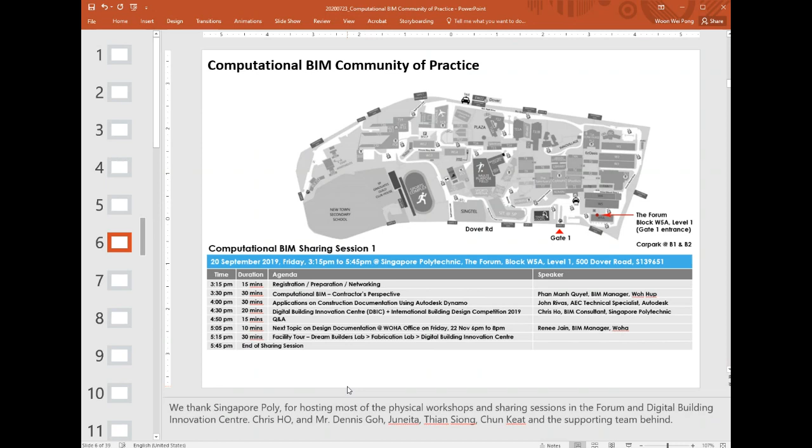So these are some of the flashbacks. We thank Singapore Poly for hosting the physical workshops and sharing sessions in the forum, and of course the DBIC, Mr. Chris Ho, and Mr. Dennis Goh, Juneita, Thian Siong, Chun Keat, and the supporting team behind.

So for all the past events, as you can see, we have Woh Hup leading the first contractor session with Manh Quyet sharing his experience. Then we have John Rivas from Autodesk leading the first session, introducing the concepts of the computational approach.

As you can see, it's very comprehensive. Then the DBIC, Chris Ho, leading the consultancy and the BIM courses. And of course, Juneita and Thian Siong leading the competition, which is actually concurrently ongoing. Today is the assessment day.

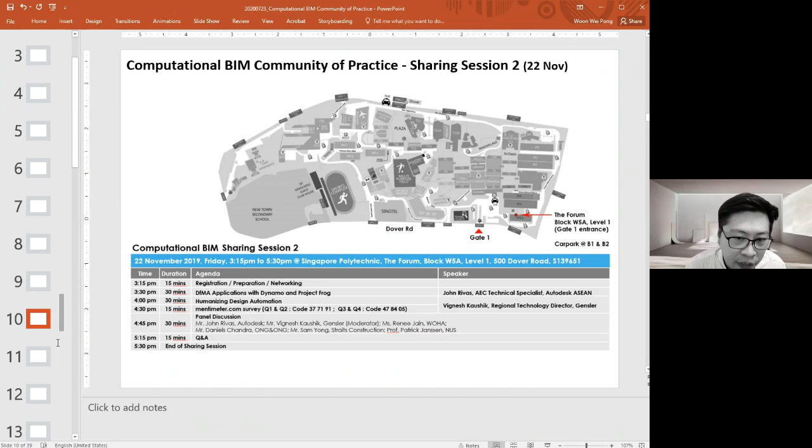So this is the second sharing session. The first session is actually led by our contractor, then the alternate one will be consultant, then moving forward, then back to contractor. So this is our arrangement.

As you can see, John shared Project Frog with DfMA. And we have Vignesh sharing about design intelligence with the human factors behind, generating lots of designs within a very short period of time.

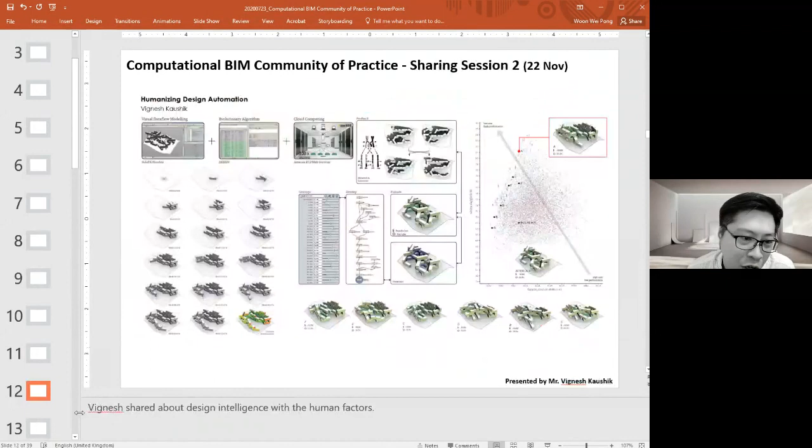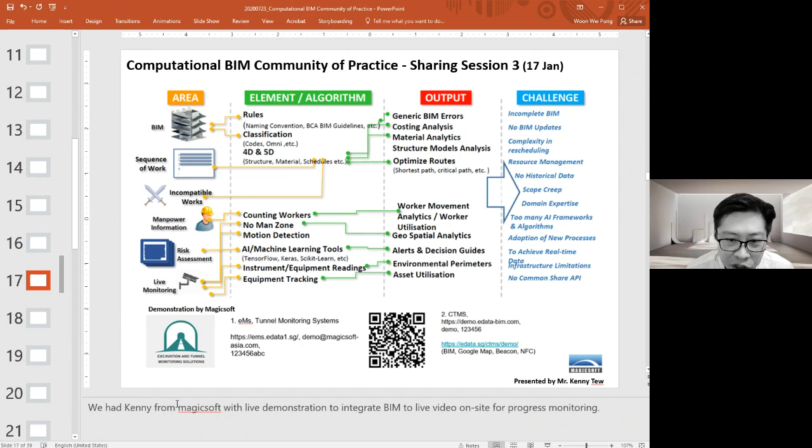Moving forward, we have Edmund Raymond from Straits Construction to share the computational BIM implications on safety aspects. Then we have the solution provider, Magicsoft, Kenny, who did a live demonstration integrating BIM into live video on-site for progress monitoring. And John also shared about BIM 360 on safety management.

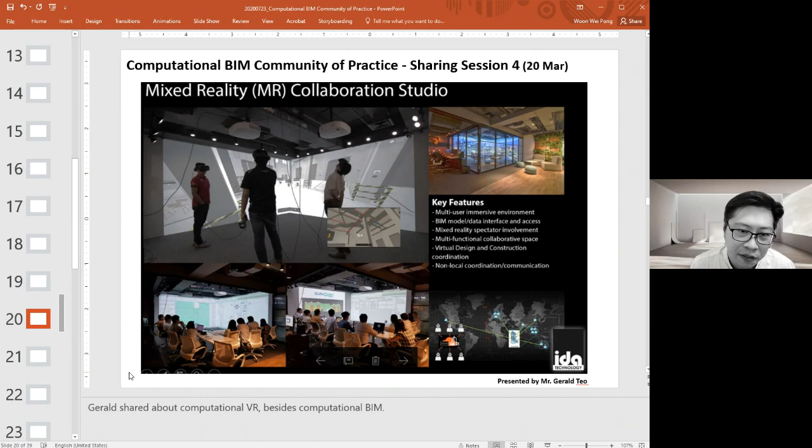Then we have IDA. During the COVID-19 pandemic, IDA hosted a session to introduce their VR studio. As you can see here, this is their studio, very small but comprehensive. With computational VR, you can actually tweak all the parameters on your laptop while visually viewing and engaging in a 3D immersive environment.

So Aloysius presented his involvement in Future of Earth by SUTD and some of his works as well.

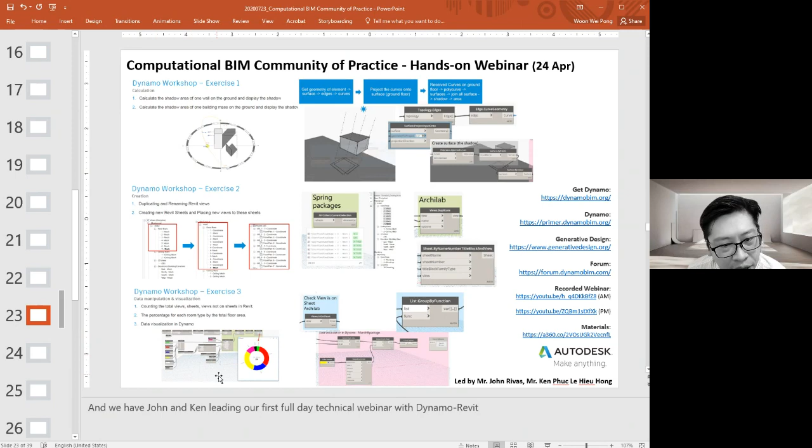John shared about using Dynamo for more applications, especially in safety. So in the past events, we have three topics: documentation, safety, and code compliance. For this, John and Ken actually led our first full-day technical webinar with Dynamo Revit.

It's free to the public, so as you can see, we moved on to webinar sessions, and Autodesk generously supported the cloud solution with generative design. And Ping Lei from CPG shared about Python Rhino calculating the unprotected opening, a very detailed session.

And all of these past sessions are actually available on the website now, recorded. So supposedly Chinacon should have shared, but he couldn't make it due to the COVID pandemic.

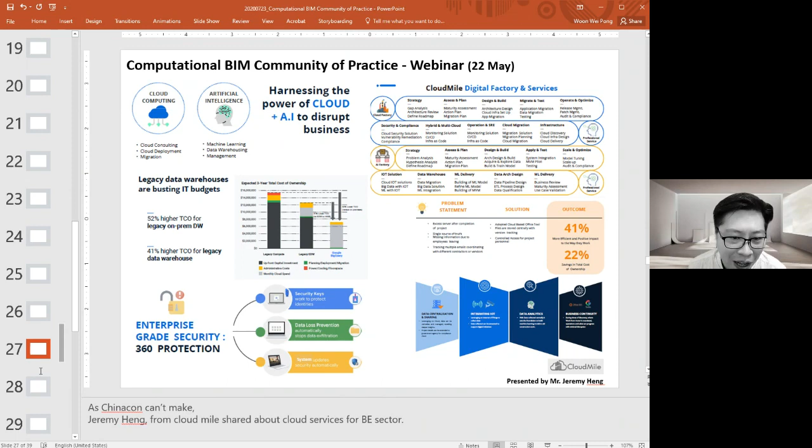So Jeremy Heng from CloudMile shared about cloud services for the BE sector.

Moving on, we have the recent workshop, again supported by Autodesk. John and Ken actually supported this workshop, Computation.space. As BIM Origin was closed, Computation.space is introduced to continue the efforts of computational BIM sharing as the resource.

So let's move on to the recent survey report. I have a few slides comprehensively sharing the opinion of the respondents. We sent it to 450 participants, and from there we received 119 responses.

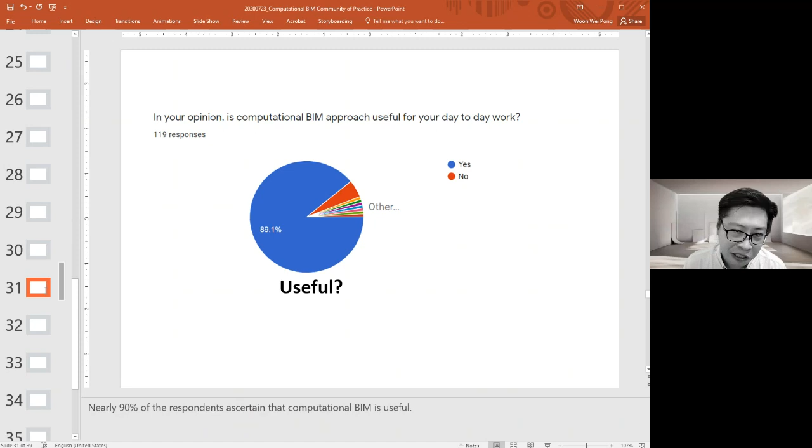First thing: is it useful for computational BIM? 90% gave a certain response that it's useful. Have they started using it? 40% mentioned they've started.

Then, why, if they are not using it, why are they not using it? Most shared that they're still in a learning process. Some mentioned they do not know how to do it. Some mentioned that it's mainly due to their contract and job roles, after investigating with phone calls.

And if you're using it, what are you using it for? It's quite evenly distributed across concept design, design development, tender documentation, construction documentation, and others as well.

So what are the hurdles, meaning the difficulties encountered in applying computational BIM? As you can observe, there's a steep learning curve, insufficient resources, and slow speed. What does slow speed mean? Sometimes the visual programming, when it comes to certain complexity, causes the software to hang. So the problem is how to move forward with this.

I suppose there could be solutions that you guys can share with us. So we're asking: can you share your computational BIM experience in one of the upcoming webinars, such as a talk? Roughly 70% mentioned yes. And can you share it on the website? 20% mentioned yes. Moving forward, we're trying to collate the responses, as you can observe.

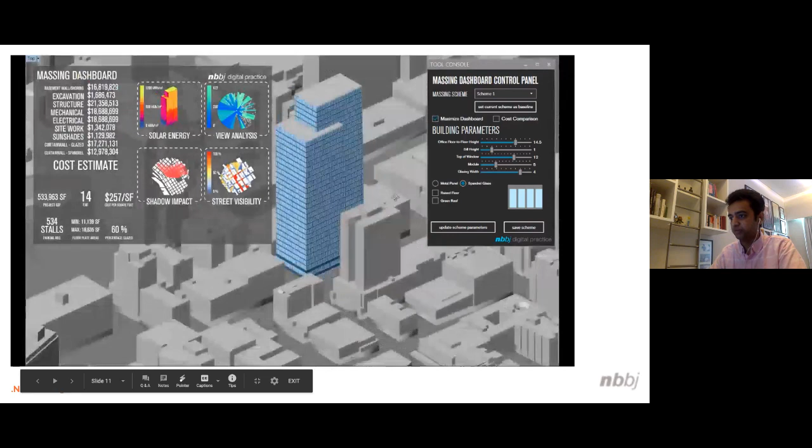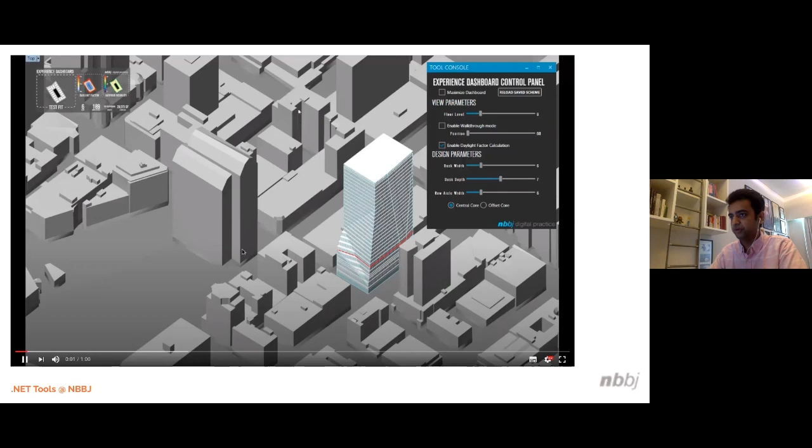This is within the Rhino environment, and we're doing this massing analysis dashboard or control panel that shows, based on any building scheme, what kind of cost comparisons you get, material estimates, and so forth. Moving to the next slide since this is more of the same. This is another similar dashboard that we built, I think about 3 or 4 years ago, and this was more about human experience, understanding interior views and daylight and so forth. Again, very similar to the previous dashboard, just looking at a different idea and getting different data out of it.

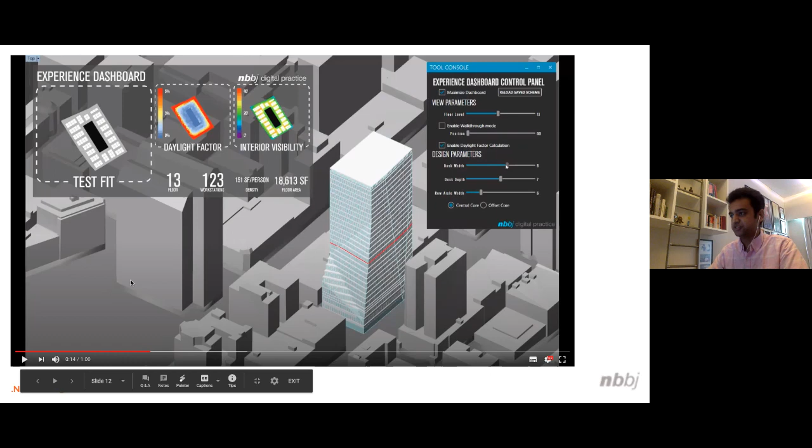So this is the kind of ideas that we had in the beginning. We wanted to build these tools that gave you data side by side in your design process, primarily in the Rhino environment. And this worked great for a while. I wanted to show you guys some of the projects that came out of this kind of thinking and these tools that we've marketed widely.

Another tool, again, you can see is kind of auto-generating documentation for this thing called prospect refuge theory, which is a theory of brain science that we like to use to implement our designs.

So in that whole thing you saw, it looked pretty great in some contexts, but we had some issues with this process. First of all, the UI was a little bit dated. For those familiar, Human UI is built on WPF, which is the Windows framework for presentations. WPF is useful, but it's also kind of old and a little bit dated. It also leads to poor performance, complex workflows, and most importantly, if you want to make any change, you have to ship these Grasshopper files or EXEs to 900 to 1,000 designers in the firm each time and have them reinstall it, which turned out to be a huge problem for us.

But anyway, going beyond the issues, I just want to show some project case studies to show the kind of things we got out of this way of thinking. So the first project is our Samsung headquarters in America, in Silicon Valley. This project was one where the client extremely heavily asked us to rely on data as a way to inform the design process. And this building was extremely heavily simulated, analyzed, and almost every single formal decision being made is backed up by tons and tons of analysis and data.

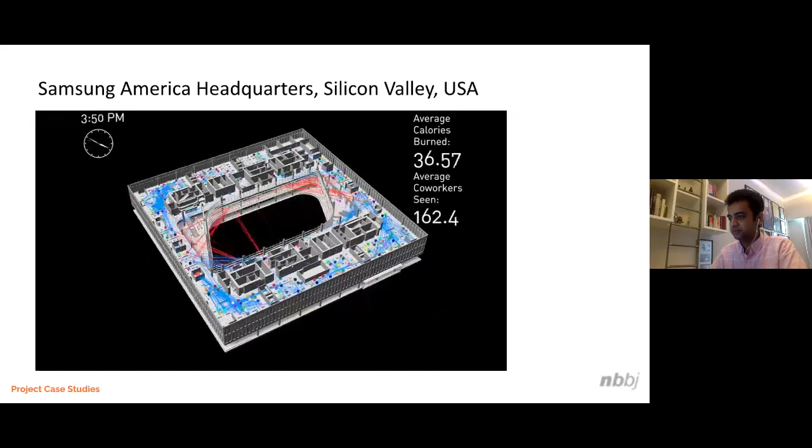The other one, which is more towards computational BIM, is the Denny substation in Seattle, Washington. This is an electrical substation—where power comes from the power plant, gets transformed into a lower voltage, and goes to your house. In this substation, we wanted to design something a bit more friendly to the urban context. Most substations are very ugly; you don't want to actually be near them. But we wanted to take the substation and turn it into somewhat of an urban park.

That's kind of how this form was generated. But to generate this form in the end, we did a lot of analysis and simulation to understand two main things: the performance capabilities of this substation in terms of daylight, and secondly, we wanted to minimize the surrounding buildings' view into the substation yard, so people don't have to see the electrical equipment they don't want to see.

So this is a quick video. I'm not going to go through the entire thing, but it shows our process of how we went from design to documentation in the days before Rhino.Inside. This was just Grasshopper and Dynamo, and how we managed to get all these panels to work for us based on our sketches and daylight studies.

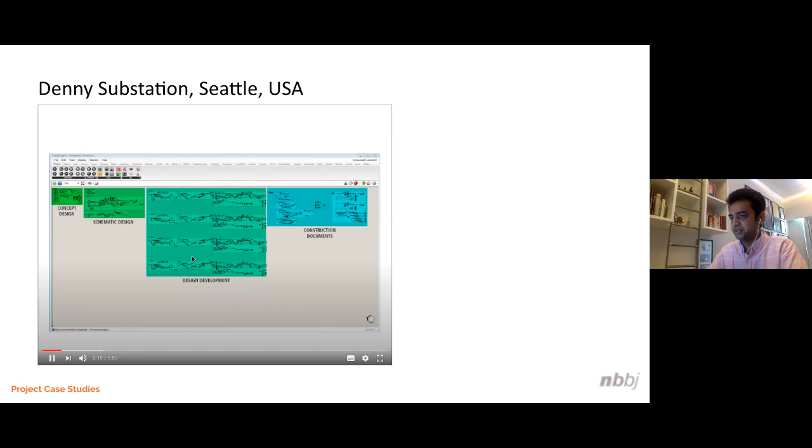As you can see, our Grasshopper script grew over time, representing the different aspects of our design process. If I scroll forward, you can see we had a lot of rationalization and design iteration along the way to make sure those panels perform the way we wanted them to.

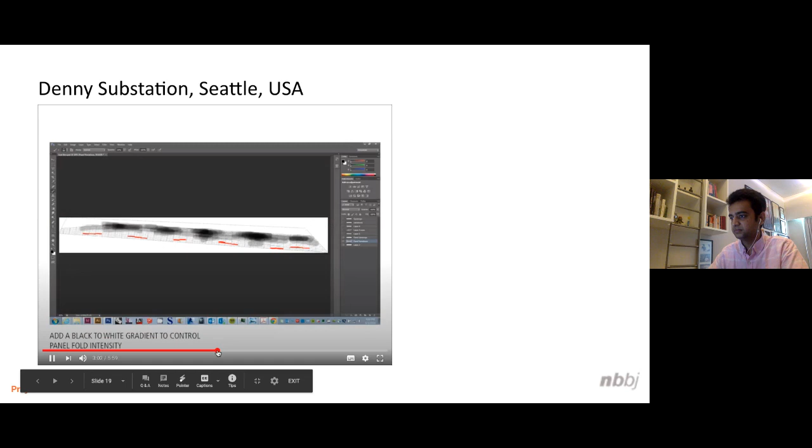The whole idea here was we wanted to quickly go from a gesture in Photoshop to a fully rationalized design idea in Rhino or Revit. A designer can take a spray paint brush and spray a certain pattern on top of this facade, and that pattern gets represented 1:1 based on paneling in Rhino or Grasshopper. That's the whole idea behind this gestural looking facade in the station.

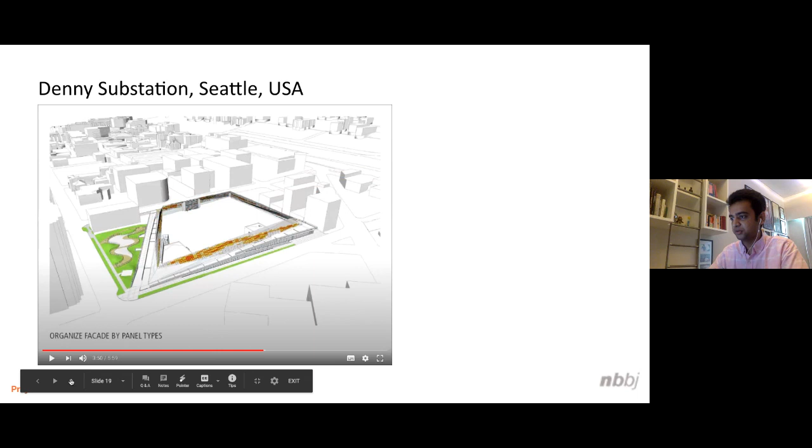Beyond the design gesture, we also wanted to optimize the layout of these panels, using daylight and heat studies to understand which panels are getting heated the most and how we can optimize that. We did solar studies to minimize the solar radiation coming onto the yard of the substation, which also helped inform the layout of these panels.

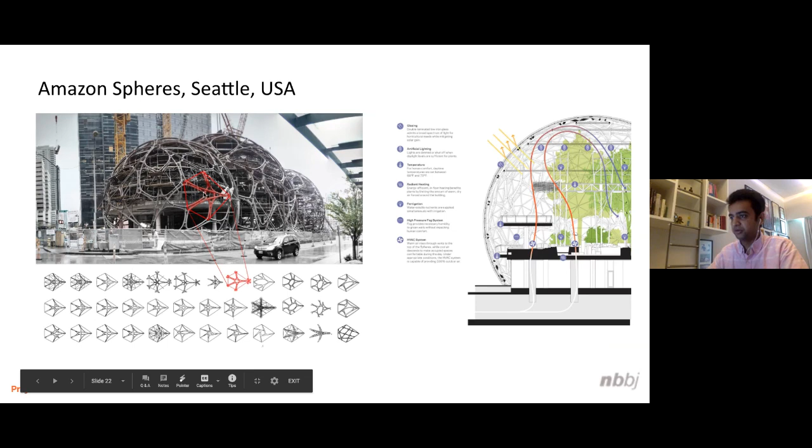This was something we studied a lot using Grasshopper, coming to a final conclusion on shape in coordination with our structural engineers. This is another quick video showing how we tried to figure out how to get an entrance into this building. That's a fairly easy problem on the face of it, but there are tons of considerations when creating an entrance based on this structural shape, so we ran a bunch of analysis based on this digital model.

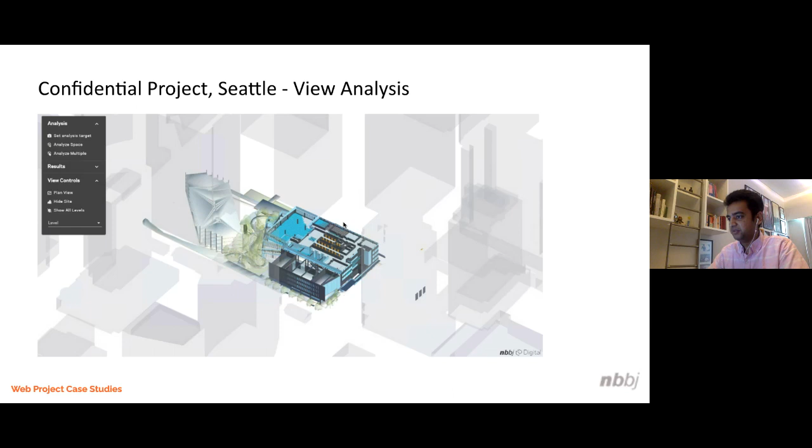We also have a web daylighting tool, which you can see here. I'm going to skip through this since the next tool is also quite useful, and I want to leave space for questions if there are any.

This was another tool: a survey that we send to our clients to understand how the space is performing for them, how they're feeling about the space, and so on. We then collate that data and represent it to our design team so we can better understand how to serve our clients better. This tool is also a web tool—a web survey, just a link we send to clients—and it was built completely from scratch by our team to maximize customization of the survey.

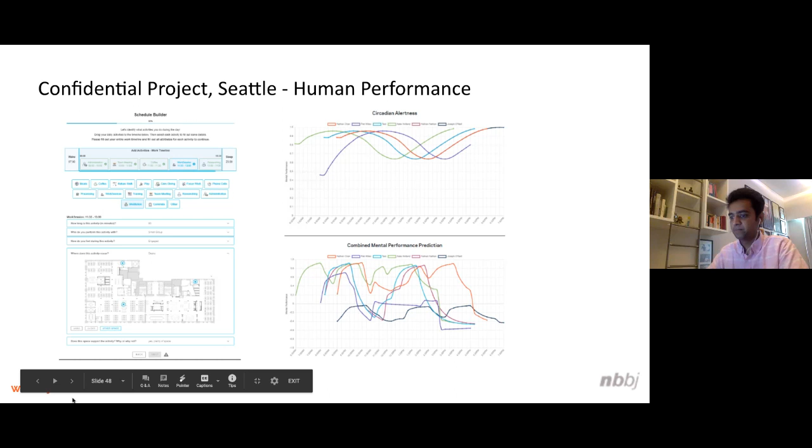Lastly, this new web process we've been working on primarily relies on three principles: modularity, reusability, and reliability. By moving from .NET to web, we've become a lot more effective at achieving this. The exact reasons will be in my slides, and if Yvonne allows me, I'll be happy to share them with you. But for now, take my word that moving to the web has enabled us to do this a lot better than before.

At the end of it, this leads to better business performance. Having a better tool set leads to lower cost of change, higher performance, and most importantly better experiences for everyone—developers and users alike. That's the main idea we're going with in this web tool experiment that we started about a year ago.

That was all I really had to show, and I apologize for not diving too deep into the reasons, but I'll be happy to discuss that offline with anyone interested, or share slides. I'm going to stop here and open it up for any questions, or pass it on to the next person.

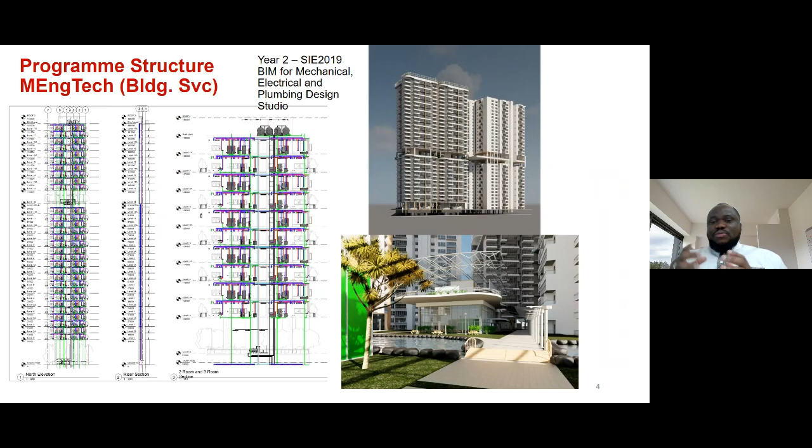and they were supposed to design the architecture, then from the architecture in Revit, convert it to mechanical. For students to develop something like this, they have to go to different resources online, different Revit communities, to learn how to solve the computational problems they encounter. But the design aspect, we teach them a lot.

This is another example of work done by a year 2 student. I can proudly say you rarely find a year 2 student, even in Singapore—I'm not talking about an architecture student, I'm talking about a mechanical engineering student—able to do something like this. This is an example of what I mean by training our students to be ready for the job, for the industry.

Because if they want to do computational BIM, they need to know how to use Revit, for example—they need to be grounded in it. And they need to know how to design, how to use design to solve problems. So they designed the architecture part and the MEP part.

In fact, this is a high-rise building—everything you're seeing here was done by just one student, and a lot of them did the same thing. Here's another example from another student. When these students came in, they knew nothing about the software, especially the mechanical part, and later on they were able to do something like this.

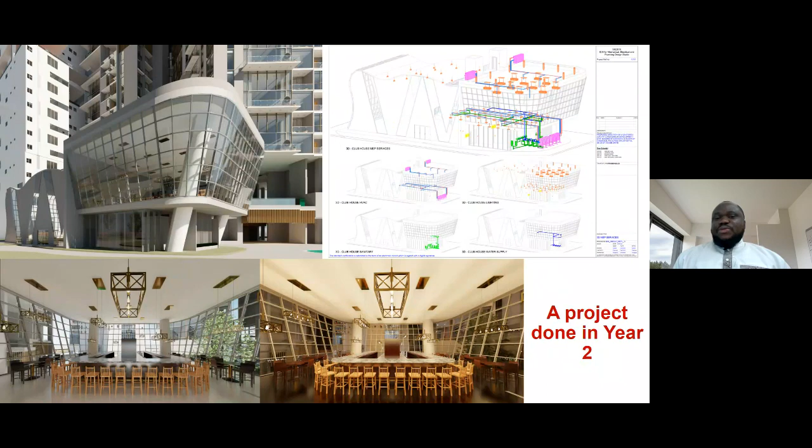All of this was done when they were in year 2, because we're trying to prepare them for the 12-month IWSP program, the industry attachment. Then during their industry attachment, this is an example of work done by one of my students with his team.

Even though the student is still an undergraduate, he was able to work with his team in his company to do something like this. During the IWSP, the 12-month attachment, we usually bring them back to the university for about 9 days, and throughout the year we train them on topics we haven't taught during the first 2 years of the program.

An example of such training is the use of Dynamo to actually solve problems in the built environment industry. The person you are seeing here is named Lo Juhan. Lo Juhan was one of our students also, and in fact, he was part of the first set.

When we started this program, we trained them about BIM and everything, but we didn't really focus on the Dynamo side, Python side of it. It was during the 12-month IWSP program that some students gave us feedback that they would like to know more about this. In fact, some of them actually used the knowledge of Dynamo and Python for their final year project. So because of the feedback we got from our students, which was part of our plan, and also from industry experts, we decided to develop this kind of training for subsequent students to further increase their skill and capability.

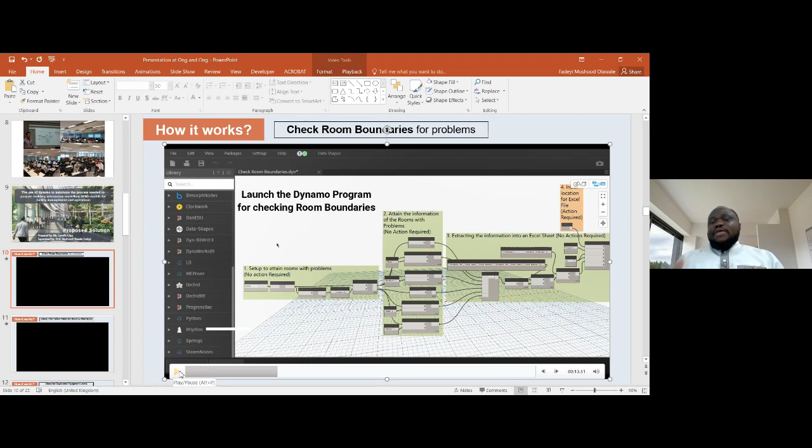The student used Dynamo to develop the solution - when you run it and use Dynamo, for example, to identify those rooms, you go straight into the BIM model to identify rooms that have problems in terms of boundaries not joining together. Later on, Dynamo will be able to differentiate those parts of the model with problems and those without problems.

Then from there, Dynamo itself will now collect all the necessary information particular to different spaces inside the model.

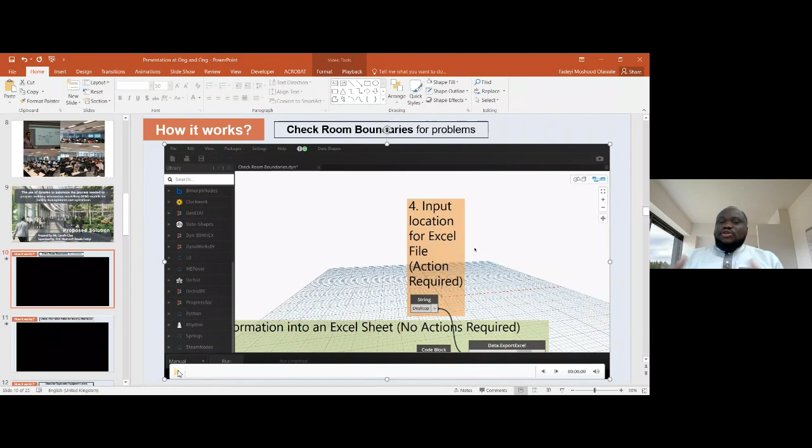You can easily notify the contractor or the third party that their drawing is not complete. In fact, those people preparing the model, if they have this kind of knowledge on how to use Dynamo to identify problems in the design, they can easily rectify their problems before they actually submit to their client, in this case the FM managers.

So another example - some of this information might not be complete. So we are using, in this case, an example of our MEP system.

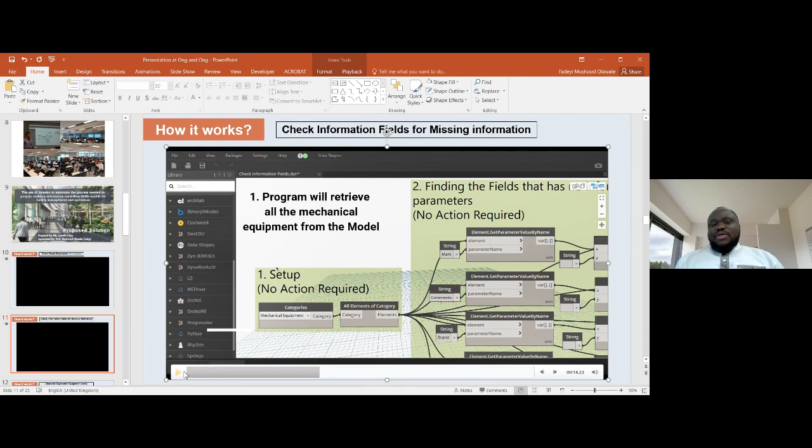My student developed all these things. She developed the program in such a way that it will be able to identify all the mechanical equipment in the model. Once you identify all the mechanical equipment in the model, from there you'll be able to...

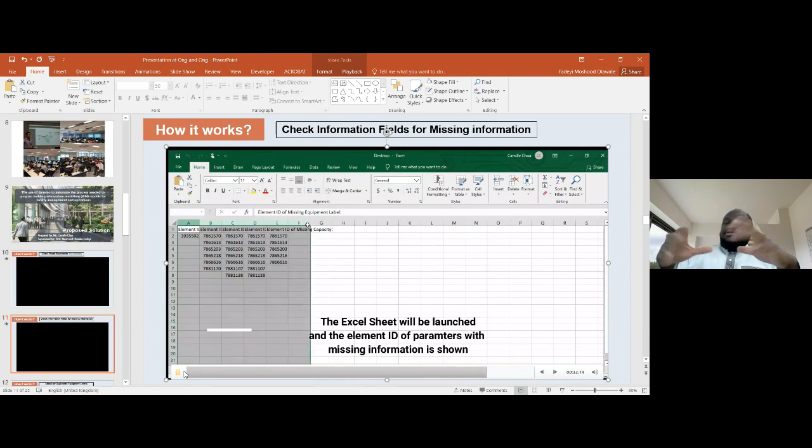This is another example on how to use Dynamo to streamline process, because it's all about process enhancement, about creating value. When we talk about productivity, it's not just about using computers or any kind of technology. We make this very clear to our students: first you must know how to remove waste from your process before you can add any value into that process. Otherwise you just increase your investment, and all the waste in your process will not allow your productivity to improve, because you've not removed the waste.

So again, teaching students how to use computational skills and knowledge they have to give value and increase productivity - this is the point I want everybody to take away. It's not just about using computational BIM. First of all, you must know how to use your design to identify problems, to identify the root cause of the problem, and use that design solution to eradicate the cause of the problem.

So sometimes when drawings are submitted, some of these drawings will just have a duplicated mechanical system. Let's say, for example, the duct could be duplicated because of poor design or forgetting to delete something. So how to identify it? Again, she used this to...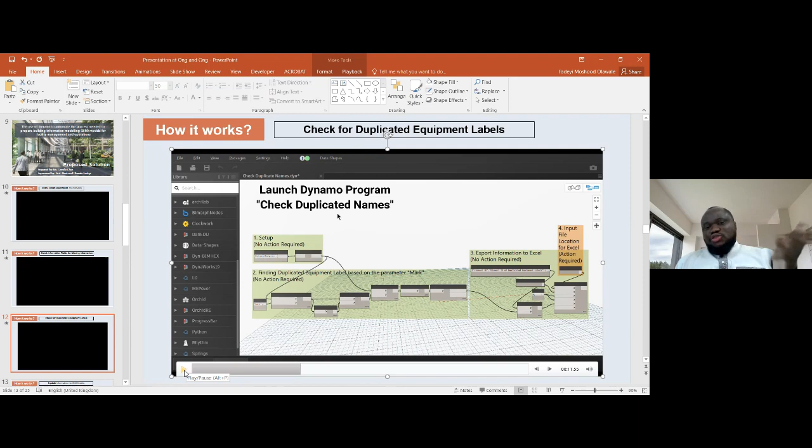But the point I'm trying to make here is this - she basically used...

I think the FM side can use the model because the model is the same as the as-built building, so you can easily use it. And I've had a lot of people saying that FM people don't really need computational skills. I believe by showing this kind of example, you better appreciate the use of Dynamo, Python, and different kinds of computational tools. It's not only to enhance the design stage, not only to enhance the construction stage - in fact it's going to be very useful at the FM stage also.

So again, she developed - I can share this slide with you also later on - how to update information in BIM models, how to delete unwanted items, and how to purge your model. Sometimes when BIM models are submitted...

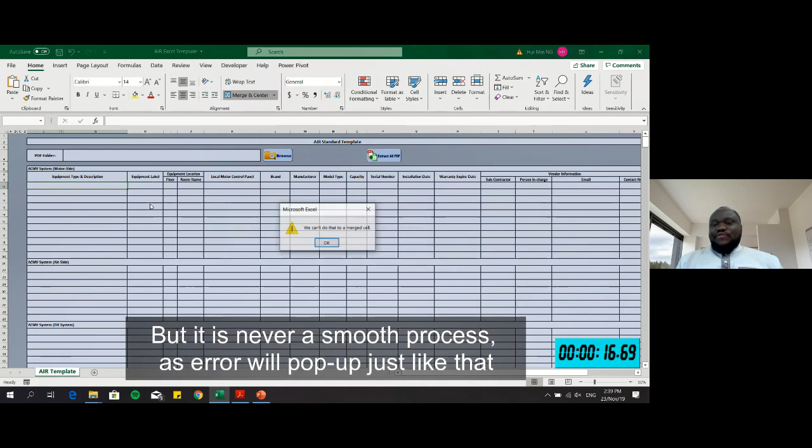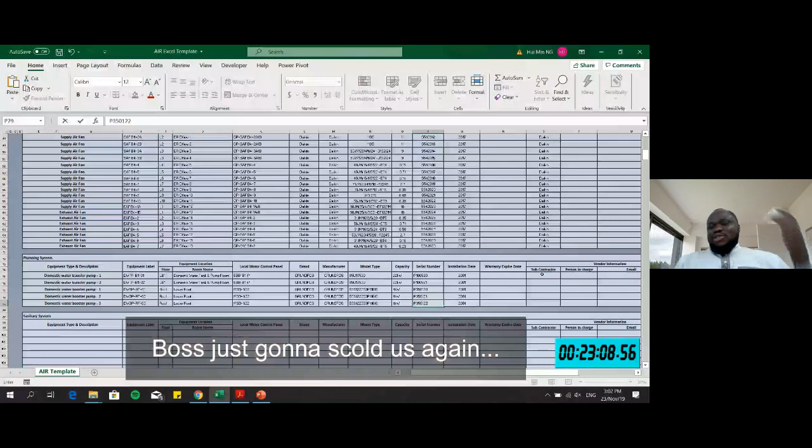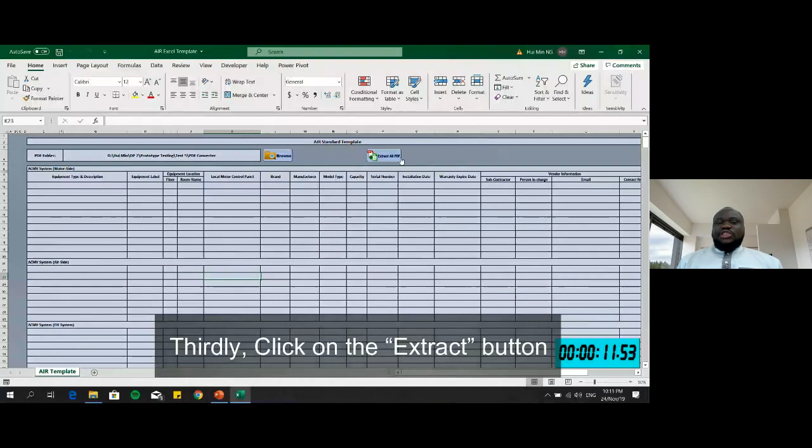So let's go to the next slide. This is basically the interface of it. So you upload the PDF. Basically, it saves a lot of time, improves accuracy, and one person can actually do the work. This is very, very important in terms of improving productivity.

What I showed you just now was actually the text aspect, in which you take text from PDF. What about pictures? For those of you familiar with FM, you know you have to take pictures, and there will be so many information. For example, let's say the aircon, the AHU, there will be so many information there.

You need to type in this information one by one into the Excel sheet, and also verify that information is correct. So a student from the Infocomm department actually worked with me and a professor from Infocomm to use Python and do a lot of programming to get information directly from image, whether PNG or JPEG. Take information from that and automatically populate it into the AIR template. This is another way of saving time, using lesser resources to maximize outcomes, and that's all about improving productivity.

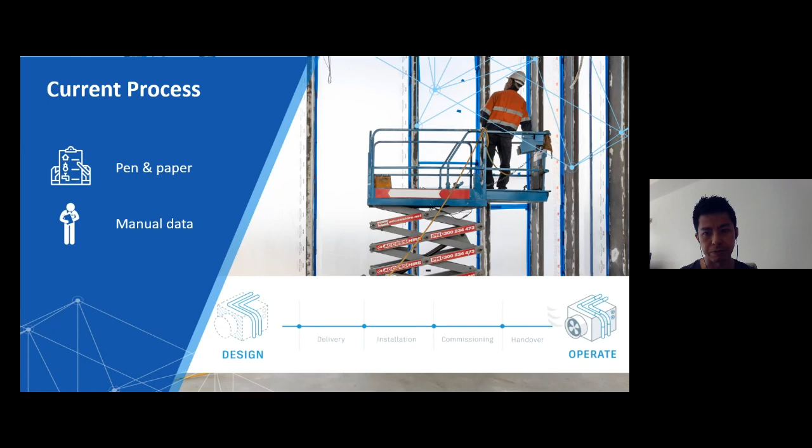Now, if you look at more details on the process itself, from the fabrication sites up to the maintenance site, basically they will go through a couple of stages. From factory, after they fabricate the modules or the component itself, they will need to load the modules into the transportations, and from there bring the transports to the site. From site, they will unload into a certain temporary holding area and proceed with the installations. After the installation, they need to capture certain data for the maintenance or the liability periods and so on.

Now, if you look at the current process, what is happening in the industry? I'm sorry, the screen is kind of lagging, so it might be off from my voice. All right, so just bear with it.

Now, if you look at all these stages, from the prefabrications up to the liability period or the maintenance: first thing first, most of the time they might be using Revit models, and they will be transferring into a fabrication tool like Allplan and so on.

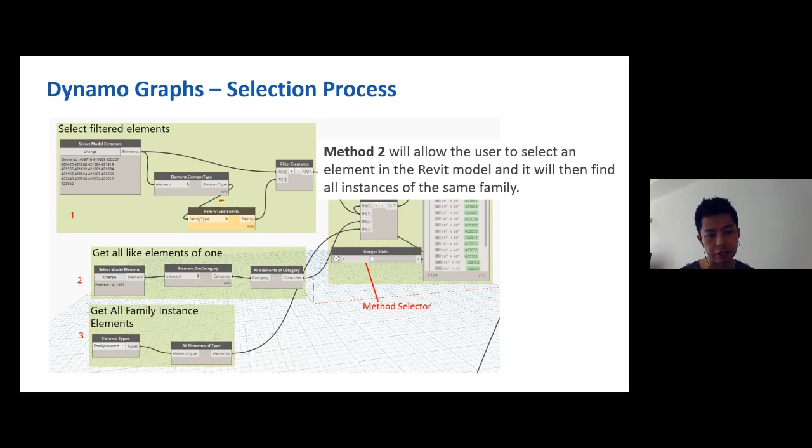In method 2, we allow the users to select elements in the model by searching for the instance or the same family, and so on. So we search for the element and match the category so that Dynamo can filter out the proper elements that we want to export into BIM 360 itself.

And in method 3, we will find all the elements that are family instances. So there's a couple of ways you can do the selection process.

Now, as of now, the Dynamo graph or scripts that we've done put all these three options together, because sometimes we do need different methods to select elements in your Revit model. So it depends on the situation — sometimes you might need to use method 1, method 2, or method 3.

So at the center, we've added what we call the method selector. The method selector is where we can control where the value will be picked up from — is it from method 1, method 2, or method 3? So basically, you can have a mix of it, or use the sliders to control it.

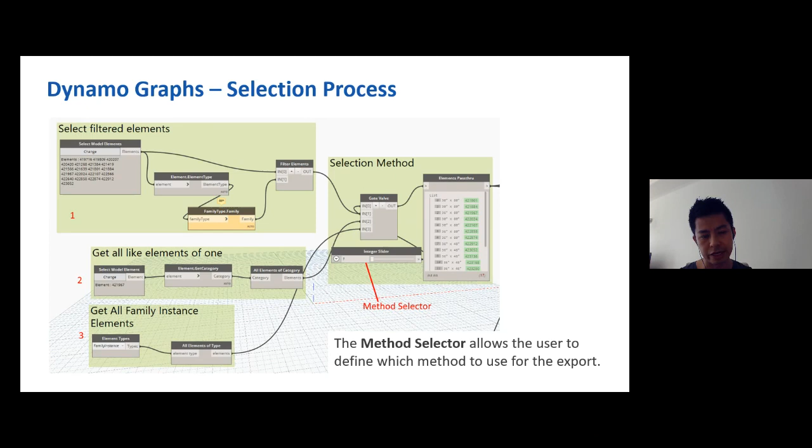Now, on the next step, I know some of you might be using BIM 360 Design. One thing that's critical here is during the selection process, the access path or the Excel data you're going to export into needs attention. If you're using BIM 360 Design, Dynamo cannot recognize the path locations because your model is not on your local server but instead in BIM 360 itself. So to keep things simple, it's best for users to store the documents on the local drive, so it's easiest to manage.

Now, once that's set, if you look at the process earlier, we're going to capture the data from Revit, and we're using Dynamo to push all the assets or modulars in your Revit model into BIM 360.

Now, just a quick note on BIM 360 assets — what it does is help you manage the documentation, centralizing all of it. So whatever modulars you have in Revit will basically become part of the assets in BIM 360.

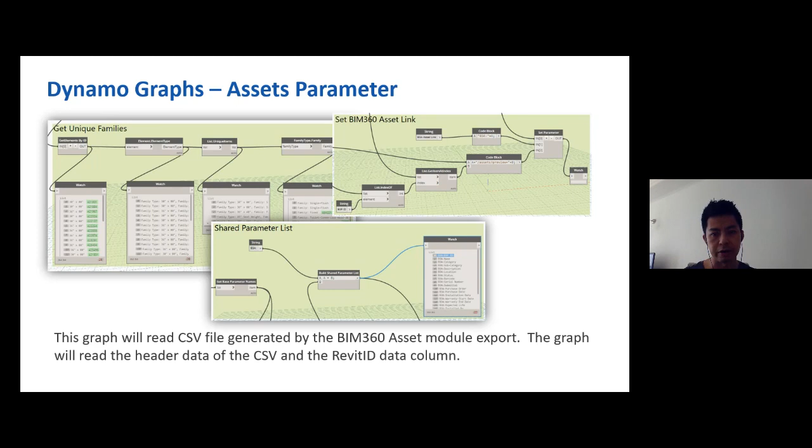Now, just a quick recap before I end my session: by using Dynamo and also BIM 360 in the workflow of the DfMA, you will be able to see that the process will be more streamlined, and also you have quicker resolutions between the stakeholders. So if I have any issue on site, the fabricator will know a minute right after I raise the issue. They will be able to immediately respond back to you, and you can continue the works on site. This kind of process will be beneficial, especially in these current situations.

Because of the COVID-19 pandemic situation, we do need to work remotely, and we need to communicate virtually to streamline the process. Also, the visibility of the project status will be significantly improved, because everybody will be aware of what is going on site and what is happening in the factory.

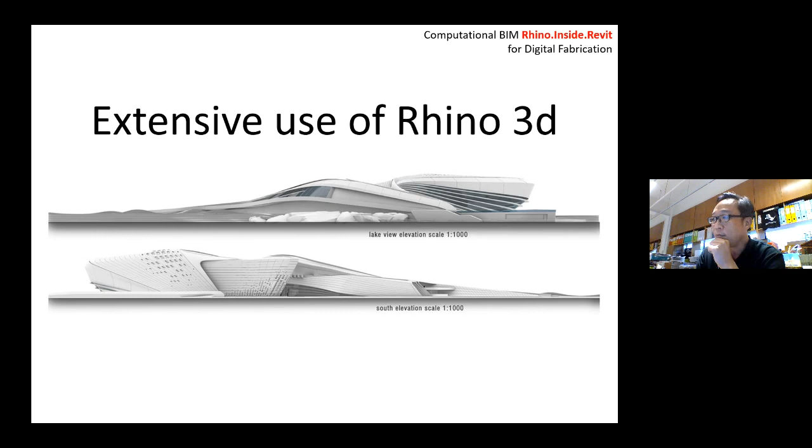So I know we have NBBJ just now sharing, and one of their project samples is Hangzhou Stadium. I guess we didn't talk about this one, but this is one of those things I was following, and then I saw the proposal, and I'm pretty impressed with the whole entire Grasshopper and Rhino integration. We can do from start to end. However, there will still be a lot of tools that we need. So Rhino and Grasshopper is more like a very open source community.

Sometimes people write certain things for each other. Of course, architecture firms, if they have some know-how internally, like their own software developer, then they have that little secret weapon inside. But the general tools, yes, most of us will be able to handle. It takes time, it really takes time. I've been talking to a lot of other users. Everyone loves to jump on the wagon. However, the difficulty is really spending time to understand the whole workflow.

Of course, this is our famous jewel. It is also done in Grasshopper, the whole entire modules and the execution. So programming is done. The structure guys did the whole entire Grasshopper thing, so I'm pretty impressed. I saw the code as well, the definition is really long.

Right, so Waffle's structure design, I was just talking to some of the customers the other day. I just brought this up because some of them were asking this question, and I was thinking, what do I put in these slides? Sometimes there's just too much information and you're trying to piece everything together. But then I thought this is fun, you know, for me it looks simple, but I believe to build this, it also has its own challenge.

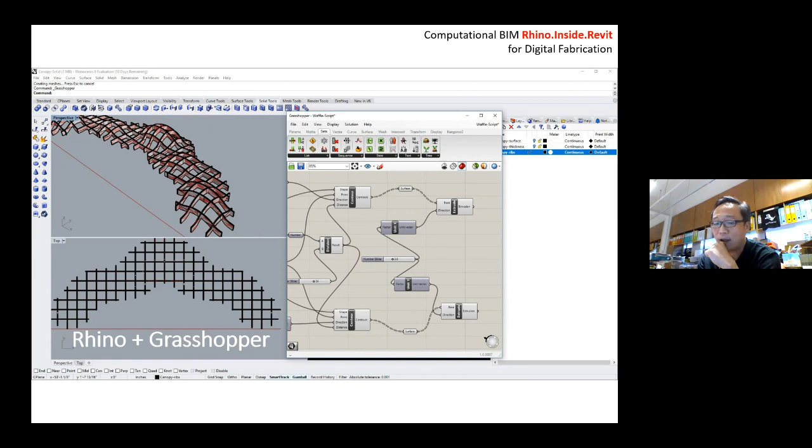So I was just pulling off some of the slides that I saw, and I thought this is nice. Okay, so for the Rhino part, it is pretty straightforward. Grasshopper performs most of the sectioning, and of course production can also be done here. But this, I believe, is also the initial phase of studying the mock-up, translating this into a basic prototype.

So in our office, we have a laser machine. Obviously this is not done by us, I'm saying that sometimes when we finish certain waffle structures, we will perform the cutout and then study it. Not so extensively, sometimes we just build it smaller just to get it done and see how the effect is. So students learn through this as well. They finish it and use the laser to cut all this out, so they have the understanding of trying to fabricate probably on their back end.

So I know the topic is what is Rhino.Inside.Revit. Just to give you a hindsight, if you know Rhino or you don't really know Rhino, Rhino.Inside is a word, like it is a statement now, officially from the Rhino team. Rhino.Inside is a term now, it's going to be used. So it could be, for example, Rhino inside Microsoft Word, Rhino inside something else, Rhino inside Adobe. So Rhino inside, it's a term now. Officially, McNeel, which is the Rhino team, decided that this is the word for this tool that is going to be used. So this is probably my longest text here.

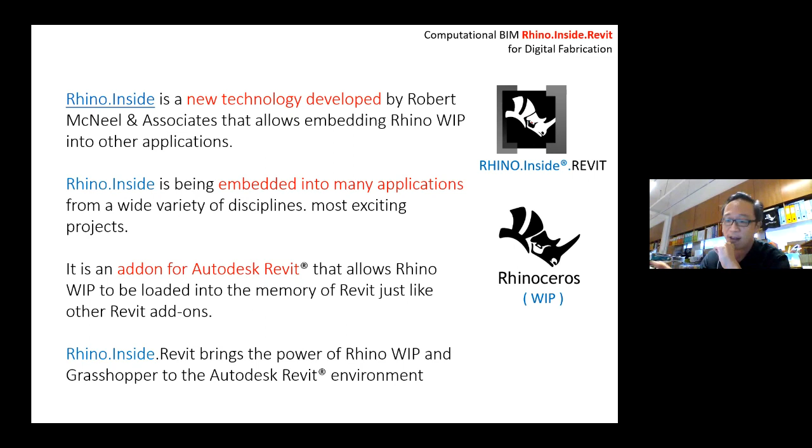Right, it's pretty straightforward. And why did Revit become part of the whole integration? Because earlier on, when we did Rhino exporting to BIM, we had some challenges, right? Unfortunately, most of the files that went through SAT or DWG sometimes failed. So the Rhino team decided that they should invest a team of developers creating this whole entire Rhino inside something. So Revit obviously is top their list, and some other tools that work with it. So practically this is what it does, this is the baseline for Rhino.

And when we use the plugin, the Grasshopper is sitting inside the platform of Rhino. And of course, the plugins all hop onto Grasshopper, and then they all become one big family.

So just to share with you, we have Rhinoceros, Flamingo, Bongo—it's all animals. Now we run out of names, no giraffe or pufferfish yet. So the funny thing is, the network drive license they call it the zoo. The zoo handles all the capacity of licensing, so you'll start hearing us say cloud zoo—zoo is the network term for Rhino.

So after Grasshopper within Rhino, there's a transition. Rhino Inside will start getting all the information into Revit, and Revit can go back to Rhino, and Rhino the other way. It just keeps exchanging this information. So I can update in Rhino and Revit is updated. If I continue my design in Rhino, Revit gets updated. This little link is very, very helpful.

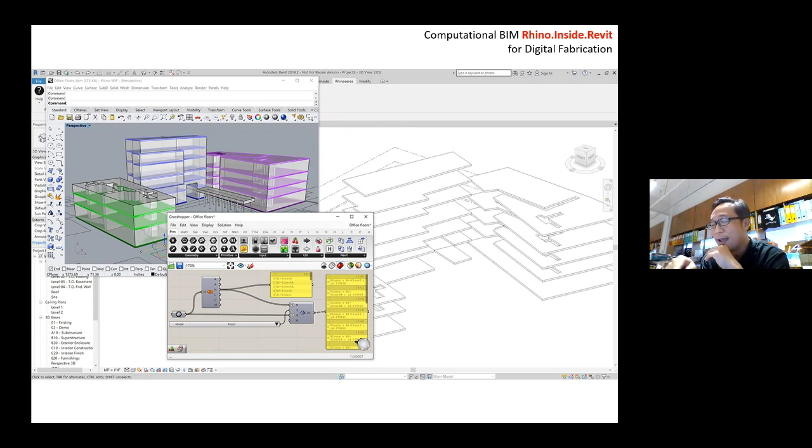So this is how the interface looks. On the background is the Revit, Rhino is sitting on the second layer, followed by Grasshopper as the final layer. So what the Grasshopper team did was create a definition to translate Rhino to Revit—basically that's the arrangement. This is another slide I pulled to show the transition between these interfaces.

Digital fabrication, big word. I have to say, really big word. I think sometimes doing this sort of transition is also a big word, and I also know that this is probably digital fabrication this way. I will do a demo—I think a demo is more interesting.

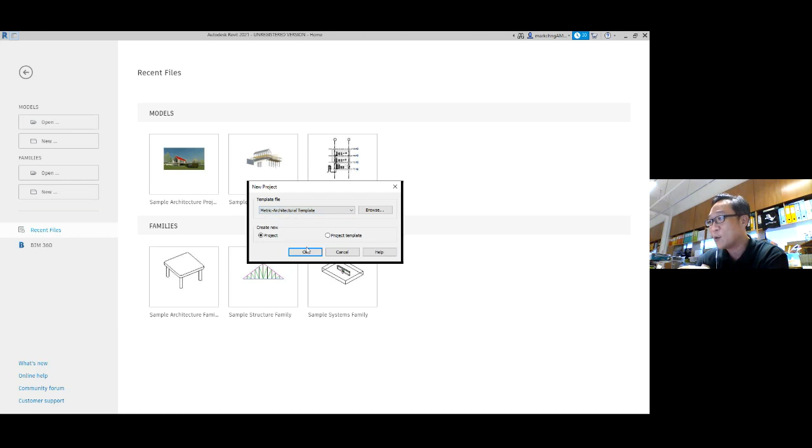So basically it's two things. I'm going to go new—okay, everyone is very familiar with this, I have all the Autodesk folks here. Okay, so I start the Revit.

Okay, so the add-on is basically there's a... I don't know why my screen is flickering, but anyway, I will turn this to my 3D view. I don't know, it's flickering. Okay, doesn't matter, I'll just carry on.

All right, so the add-on now, there is a Rhino work in progress. This work in progress doesn't sit with the current Rhino—this is the next generation Rhino. Rhino Office has released this basically for all the Rhino Inside performance. This probably will be Rhino 7. Currently the version is version 6, so in the future it will be Rhino 7, 8, 9, and our version comes really slow.

So this is work in progress. I will launch my Rhino. All right, so you see a background of the 2D sketch—basically I've done it. So just now I was trying to make sure that all the links work. So this is my Rhino platform. I drew something just now for fun as well. And then this is my Grasshopper.

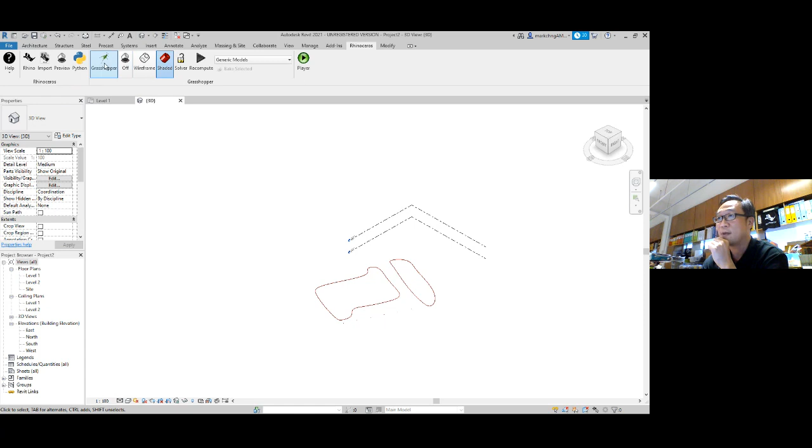All right, so there are three platforms—basically this is the Revit, second tier is the Rhino, and this is my Grasshopper. So what I do is every time I need to do a link, let's say I pick something this. I don't know why it's flickering, but okay, so let's say if I select these guys.

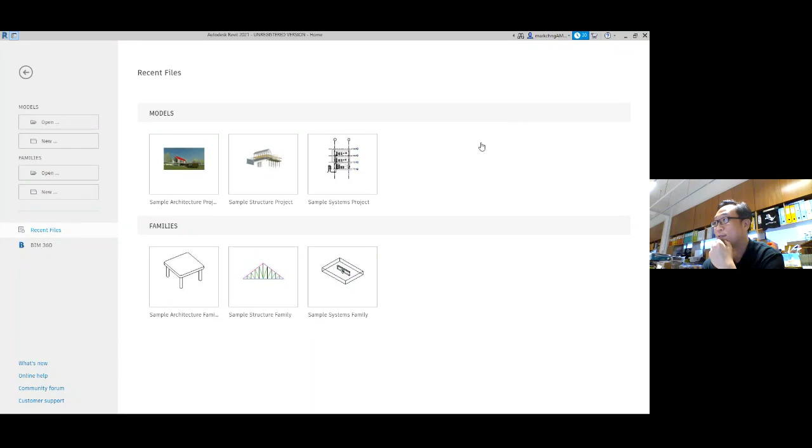Okay, you see the platform, the software? Yes, Revit. Yeah, okay. So back to this, back to architecture, okay.

So Revit starts, okay done. Add on, I turn on Rhino first. I will need to turn on Rhino. So I run the Rhino platform inside Revit now. That means I can do all my modeling with Revit minimized if I want to, in that sense.

Okay, so I turn on my Rhino. Okay, so my Rhino platform is turned on. Let's assume I pick the model that I was trying to showcase. Okay, so this is the Rhino model.

I will turn on the Grasshopper. Grasshopper is my translator. It helps me to translate my Rhino information to my Revit information. So this is what you see.

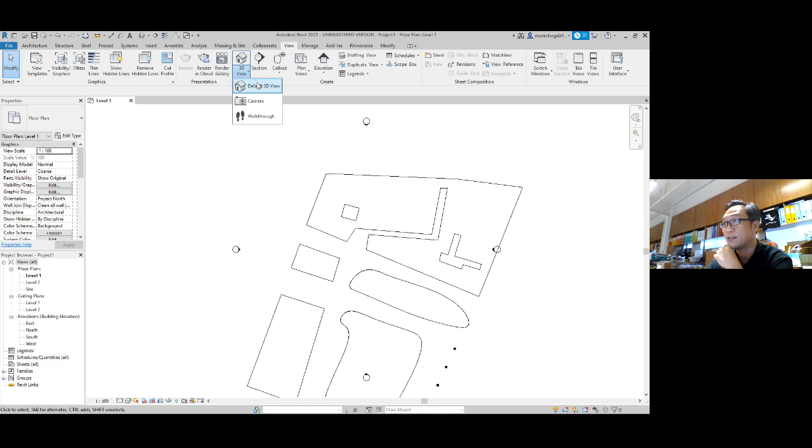I'm just going to view. Let's see if it's in 3D. I know it's flickering, it's interesting, don't know why. Okay, so if I have to, let's say in any circumstances that I need to update my Rhino, okay, I'll scale this slightly.

If I zoom in now and if I do an update, say if I pull this up, it's live. Right, so this whole link now is completely live. So every time when I adjust Rhino, it will help me to... because I have a dual screen, so I need to find where this is.

So if I were to move it up, everything will be live. So this helps me to just draw everything in Rhino now. So if I need to, sorry, let me just change this.

In any circumstances that I want to perform a new sketch now, just draw really something live, okay? So draw this, and I turn on my points.

All right, so I go to my perspective view, and maybe I just do this. So this is some canopy that I want to illustrate, and then I'll do a quick surface network. Okay, so this is something that I think is quite cool.

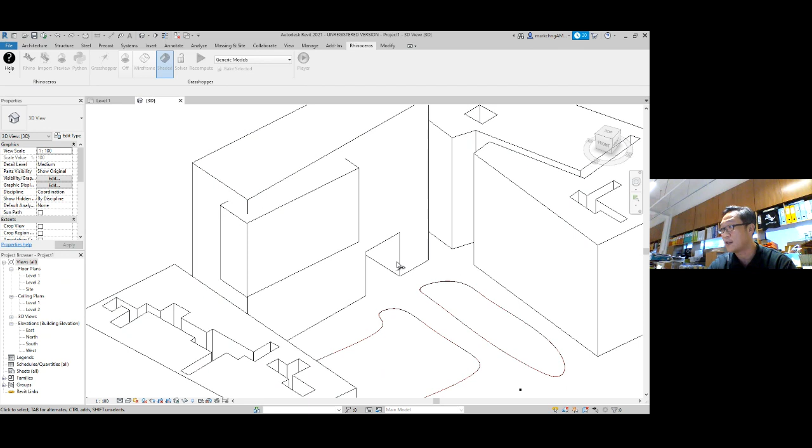All right, so I will connect this basically to the generation of the tool. So in actual fact, I should see this updated in my Revit. Done.

Doing quite badly. So if I have to, then this will be something that I can work with back and forth. And nevertheless, if I delete this, or maybe I move this somehow, accidentally I move it.

So in my Revit model, it should also be updated. Yeah, so it's all updated. So within this boundary, I could probably say we can just keep doing my Rhino and then keep my Revit there without actually moving between too much of the model export and import.

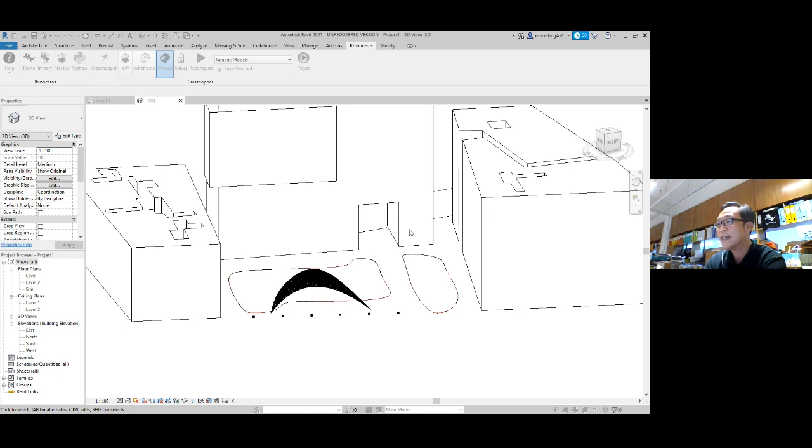Previously, we tried to export all this into SAT. We try to export all this into the format of SAT, but sometimes the file doesn't really get converted well, and then Revit faces some problems. Then the workflow becomes an interruption for a lot of users.

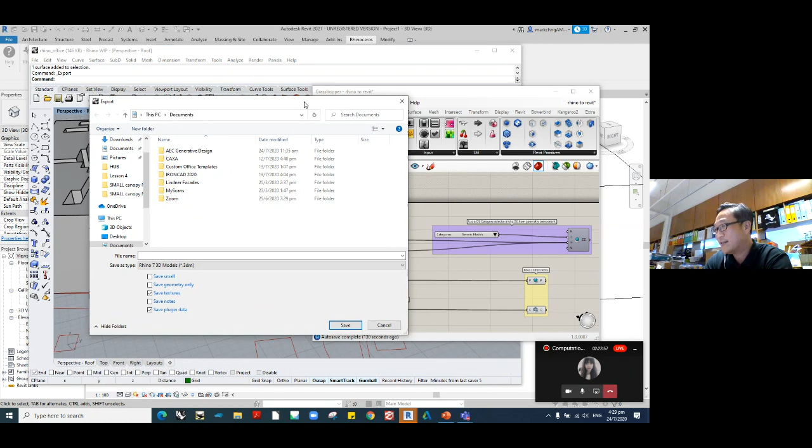Okay, so I'm just sharing with you the format. I was just talking about format - I got lost there. So the format got some problem with the workflow, and eventually some users just decided that it is really cumbersome. So this Rhino.Inside has now stabilized the whole entire workflow.

So if I again shift, assuming I shift this back to this point, okay, so the update will be natural. The update will be back to Revit itself. And then of course, if I need to perform the task of updating, can you see my Rhino now? Sorry, I have to move between screens, so I just want to ask you, are you able to see my Rhino?

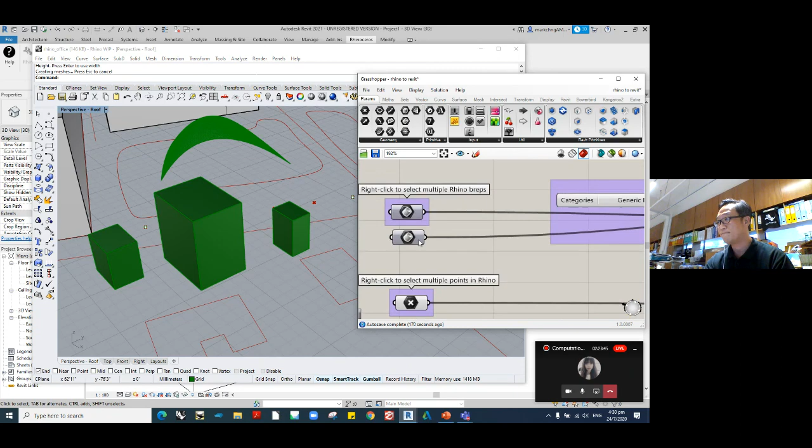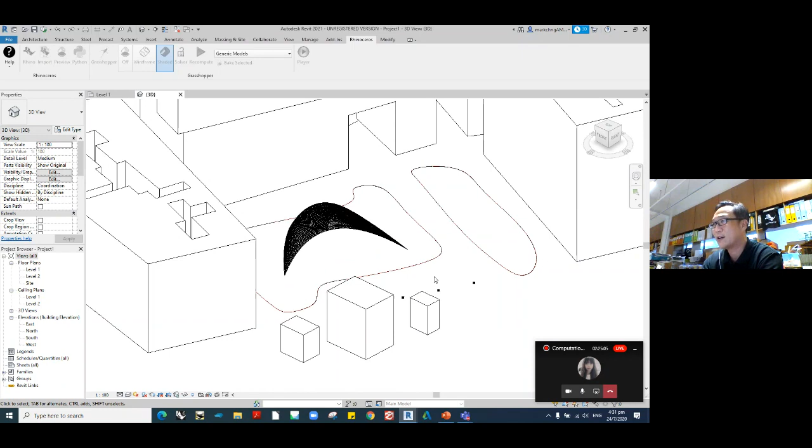Okay, I know this is a very brief introduction of what the tools are. Rhino.Inside is still work in progress, so I don't know when and how everything else is going to come together. There's no deadline - Rhino is very flexible about their deadline. So we just have to use it, and it's free. So if you are a current user of Rhino 6, this is free for you. You should be able to download and do your transfer immediately. If you have questions how to do this and how to install this, I could advise you how to do it.

So I am open for questions, Yvonne. Otherwise, we can move to the next speaker. See the screen now? Yes. Okay, you can start now. Thank you. All right, thank you, Yvonne.

Okay, so we will be the last presenter for today. And I'm actually Jaziel Magdadera, and I'm representing ONG&ONG. I am from the digital technology team in ONG&ONG, Singapore.

And what we basically do is we assist the teams, we train them, and also we help them implement not just their BIM software, but also other software that will help them optimize their workflows or make their processes and standards better. So for today's session, we will be sharing some of the few projects that we've been doing with the teams - there will be the designers, and we are just there to assist them do all of this computational BIM stuff, alongside training them as well as we go along.

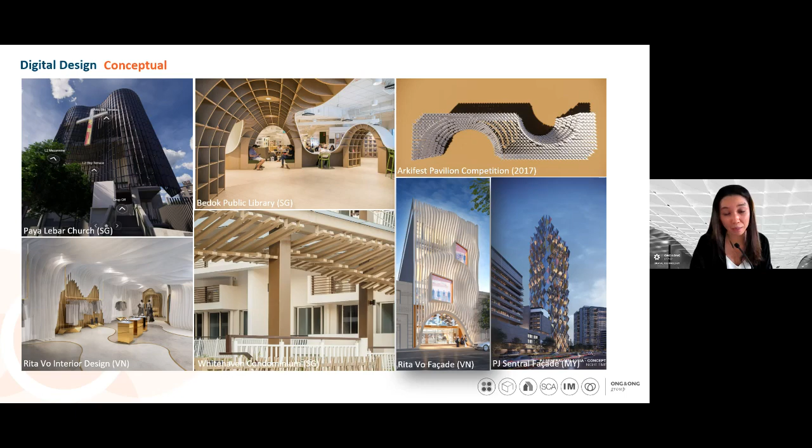I know if you're a Revit documenter, or if you do sheets in Revit and have to duplicate, you'll know exactly how tedious that task is if you do it manually. So by using Dynamo, we created this script that allows us to duplicate sheets along with the views, schedules, legends, and whatnot inside that sheet, and also rename everything.

But for this session, we'll be sharing, just like what Mark shared, something that is not too complex, but is quite fun and helpful for us as consultants. It served the purpose, it helped us achieve our goal.

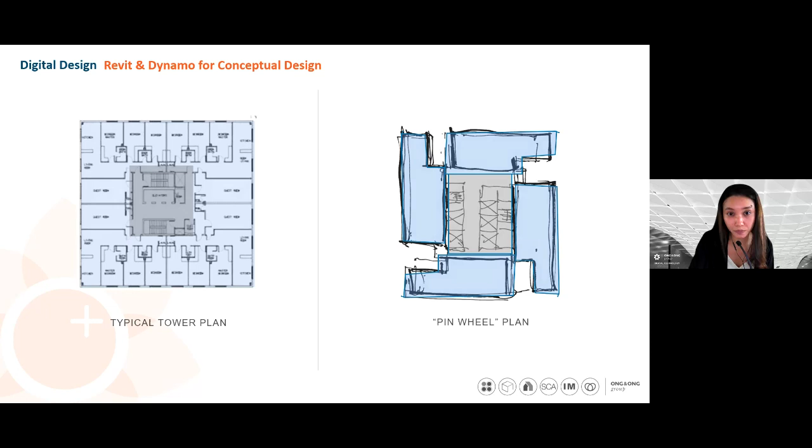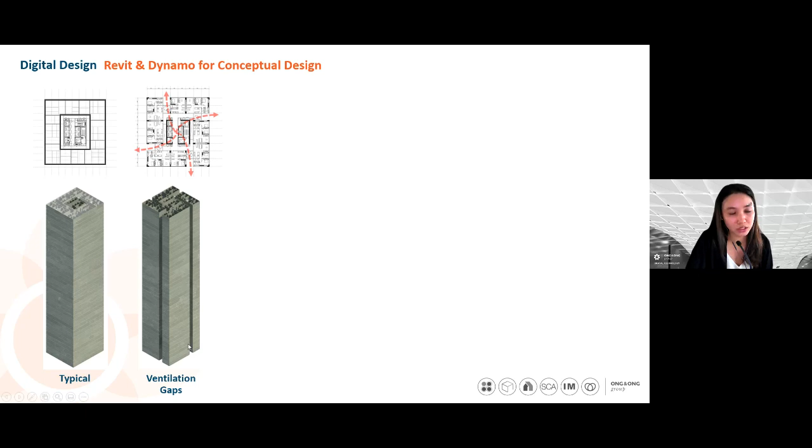So this will happen, and you will see if we stack it together on top of each other, there will be recesses at varying areas of the building, and that was good enough for the architect to create visual interest.

Now, if you already know how many floors you want and how many stacks of these floors you want, then you can just go ahead and do it in Revit right away. But for us, we wanted to explore more on the different stacking options. We don't want to just settle with one.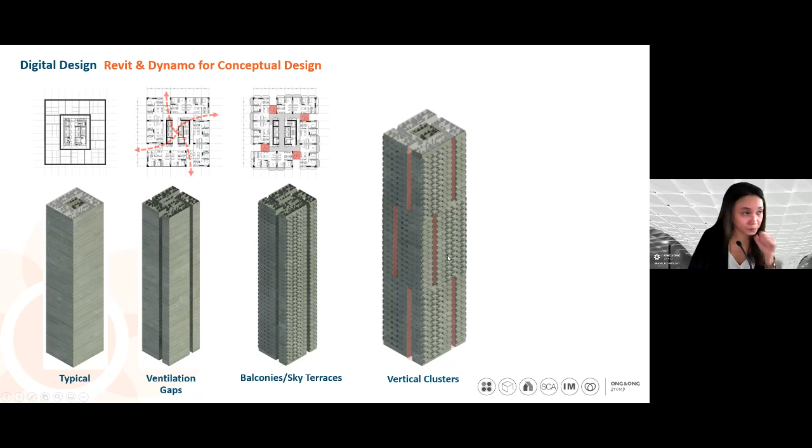We wanted to explore what if there's 5 of each floor and then alternating every 5 floors, or what if we want to randomize it? How many randomized options can we have? And so this is where we actually tapped Dynamo to create.

So I'll just be showing you a short video on what we've done. Basically, we created two modules here. At first, it's a generic model because we only want to see how it would look like in the exterior view or the facade. And the user or designer will just have to input the name of those modules.

Then they can adjust the number of floors and also create this randomized module location, basically creating several randomized options. The third option lets the designer modify the ratio—for example, 40% of floor plan layout 1 and 60% of the flipped layout. So they can control that while also randomizing the locations of these floors.

So as you can see, just by sliding, they are already able to generate different options there. Okay, sorry, back.

Later on, we decided to add another option for them to create vertical clusters or divide them according to the number of floors. So we have this other option here. What they can do is choose 1 on this slider if they want to randomize, or 2 if they want to create vertical clusters. They can change again the number of floors.

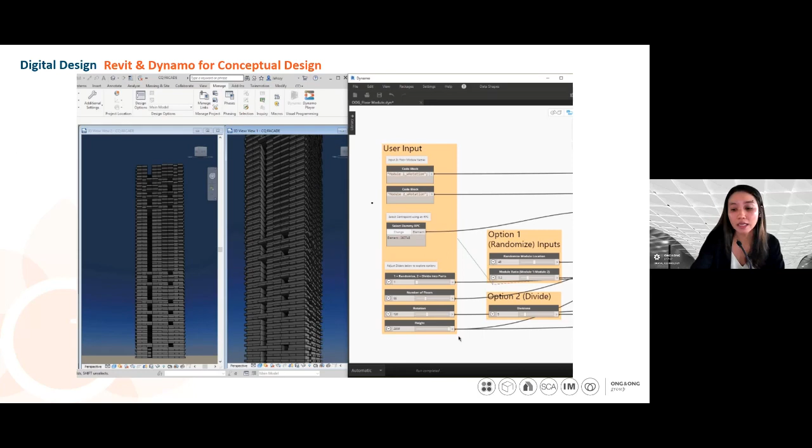Okay, now the next project, well, this is actually a small one, and it's also about modules. This is for our existing level 9 lobby in our office. So if you've been to the ONG&ONG office at level 9, you'll be greeted with this hello symbol when you step out of the lift. We were looking at replacing this with something modular for the entire ceiling.

I'll be talking more on the second design, because I think the first one is a little bit too common to do. This one, although it's quite simple, can take you ages to do in Revit. So we also used Dynamo to help us do this almost instantly with every single image.

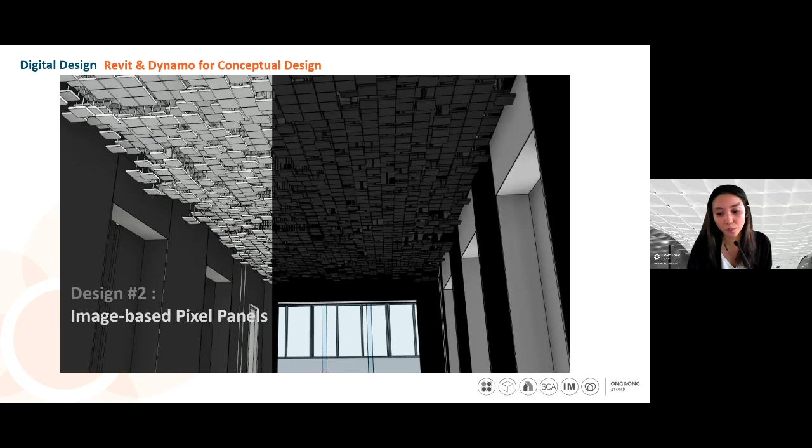I'll show you how we're able to do that, but let me discuss the concept a little bit. Of course we wanted a randomized look made of modules just like this. But even if it's randomized, it's not actually randomly placed, because it's still based on an image—so if you look at it from a certain angle, you'd see the base image.

Okay, and to do this, of course, we need our own image that we want to use as a base. And then from that image, we divide it into pixels. The size of these pixels will be based on the modular panels used for the ceiling.

So for this one, it's 150 by 150 mm panels, and we divided the image into these sizes of pixels. Based on these pixels' colors, we get either the red, green, or blue value. For this script, we decided to use the red value so it's consistent throughout. That red value we then mapped to the maximum and minimum offset values from the ceiling, or the distances of the panels from the ceiling. That's why it creates visual interest by adding depth to each of the pixels.

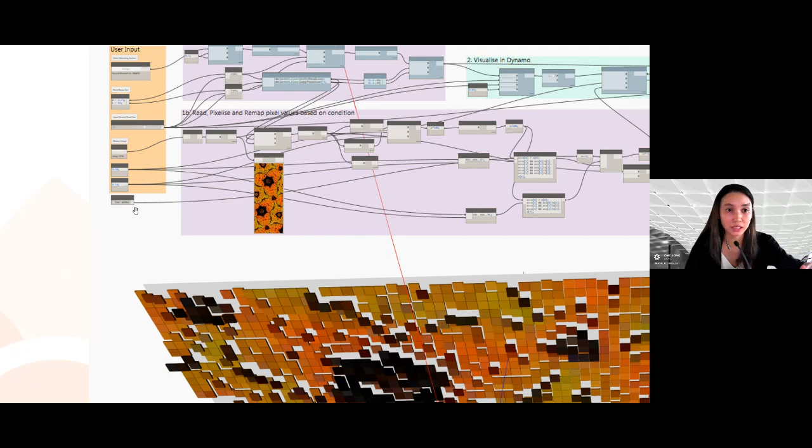After that, in Dynamo, it will create this series of color-coded panels, and we then push it to Revit, using the RGB values and mapping them to the offset values of these panels. These panels have offset parameters so that we can actually control them.

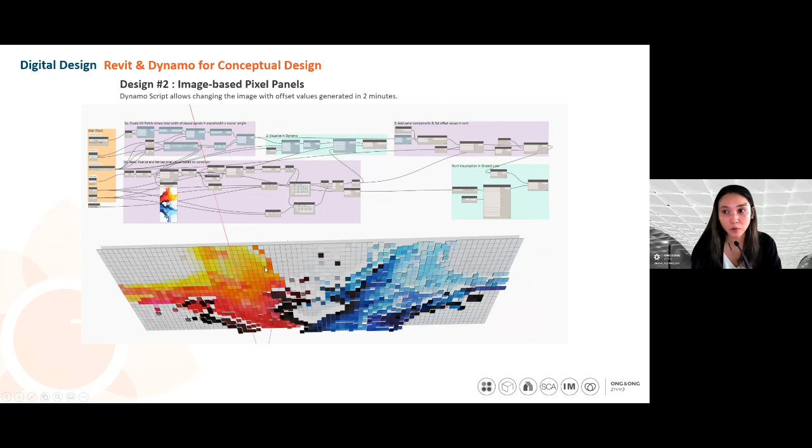And while playing with several different images, right, this is how it will look like still in Dynamo. And pushing into Revit, these will all have one single color.

This is another image. So basically, you can just change it with one click of a button - just download an image, or if you have your own image you want to feature, the designer will just have to upload it, put it here, and run.

By using the script, you are not going to be doing it manually, right? Because good luck if you do this manually - it will take you a while to finish everything, especially since there's 150 by 150 pixel panels. There's probably a thousand of these panels on the entire ceiling, or hundreds.

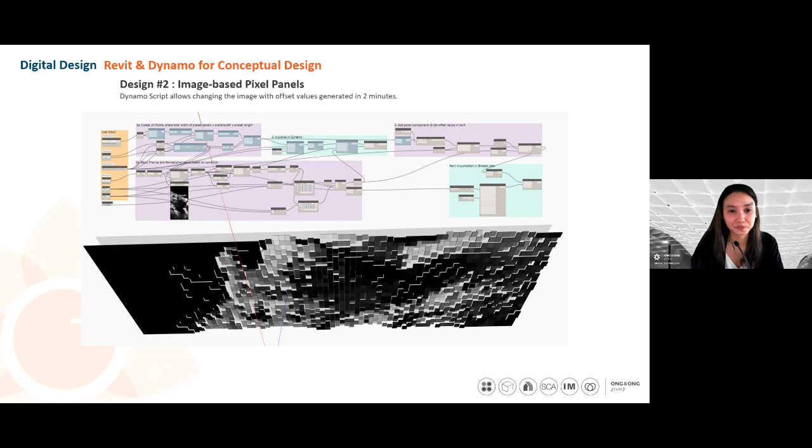Okay, so yeah, these were two of the projects which we have played with Dynamo with, which served its purpose, gave us what we want to do. And so I will be passing this presentation to my next colleague, Arthur, for the projects that he's worked on.

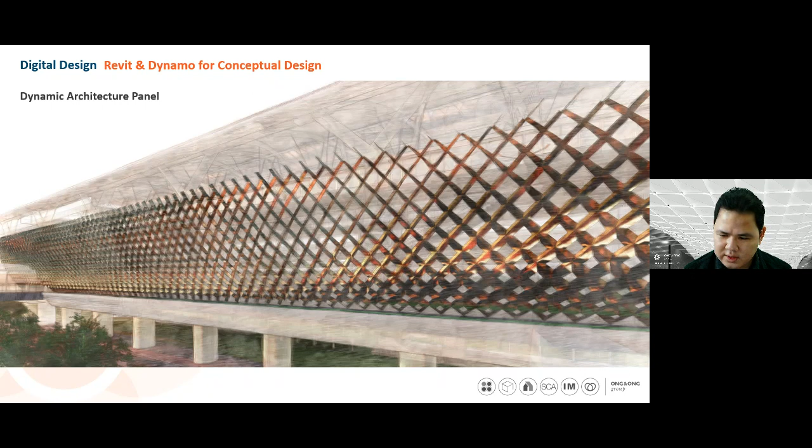Yeah, your turn. Hi, good afternoon, everyone. I'm Arthur from Digital Technology team at ONG&ONG. Today, the last presentation will be very short. I will just be presenting a solution that we came up with to resolve a problem using Revit native components and Dynamo scripting.

The challenge in this project is to create a seamless facade element that is dynamic. We're trying to strike a balance with the opacity of the facade - visually open in certain places, such as public corridors or escalators, and gradually closing in areas like back of house or machine rooms. The main challenge is gradually opening and closing between these areas and creating design options to produce the most optimal design result.

Although it is possible to do this manually by setting up each facade panel individually, that will take a very long time and be a very time-consuming process. It will not be adaptable to any design changes. In this case study, we'll be using a computational tool to help us answer these challenges.

Hello, Arthur, I think you are muted. Hello, yeah, I think maybe we can go back a few seconds. Okay, now we can hear you. Where did I stop? The introduction. You're done with the introduction. Okay, after this slide.

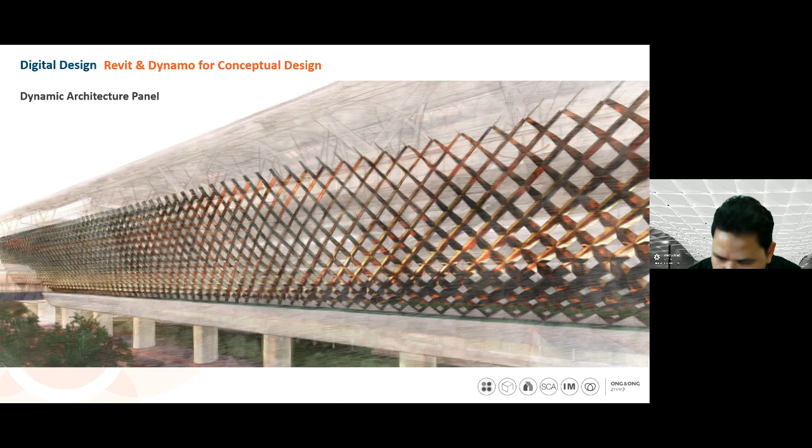Okay, first we need to create the adaptive facade element. This facade element opening is controlled by a single parameter that will adjust how wide it will open and close in the project. So we can see by adjusting the controller, we can have the facade element open and close.

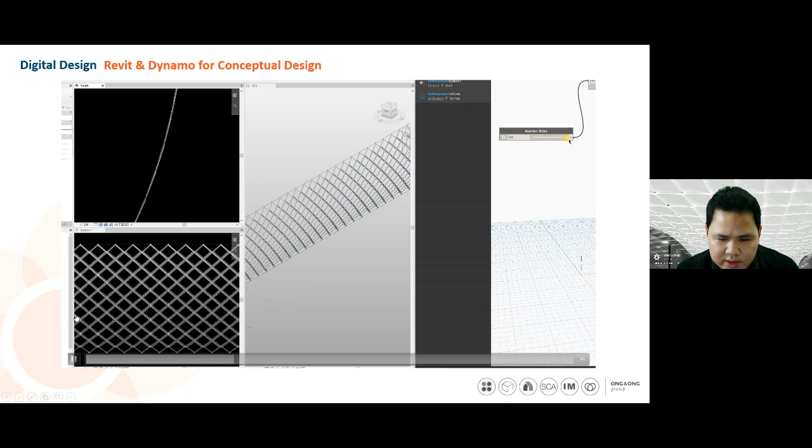Second, we populate the facade with the adaptive panel element and flex the opening panel so it can close and open, also by adjusting the controller by a single number. So far this is a very manual process, no computation involved, because it's controlling every single panel in the facade.

The next step is we want to have a controller that can affect the way panels open and close. This controller can be a point, multiple points, a line, or a curve. For today, we'll be using an arc to control the facade opening.

So this is the arc that will control how the facade is going to open and close. The closer the panel is to this line, the wider the opening of the panel. Each point of this line is parametrically adjustable using the software tool. This will help the designer fine-tune the design of the facade.

The last step is to connect this arc to the facade element. The software will calculate the distance between the line and each panel and adjust the opening automatically.

So we can see I'm playing around with the arc shape. Whenever I change the arc shape and location, the opening will be adjusted to the facade. Although it's possible to do this manually, I think it will be a very time-consuming process. The tools we have will help the designer fine-tune the design and make decisions faster.